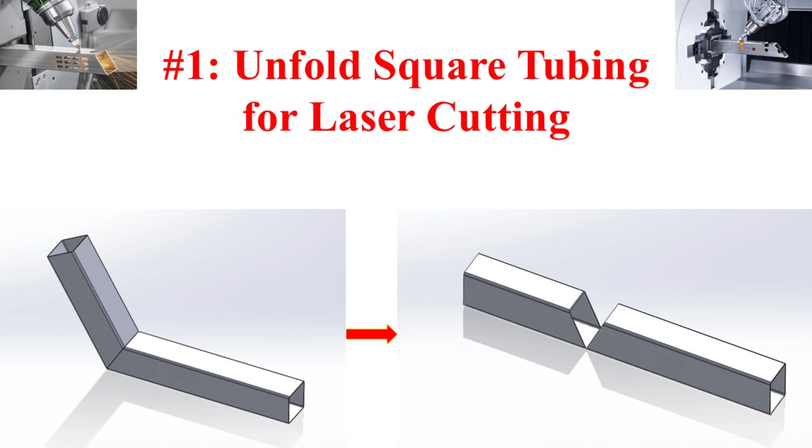Today I'm going to show you the first video on the list: Solidworks weldments and sheet metal laser cut design. This article will make the simplest part, a folding steel square box. Let's get started.

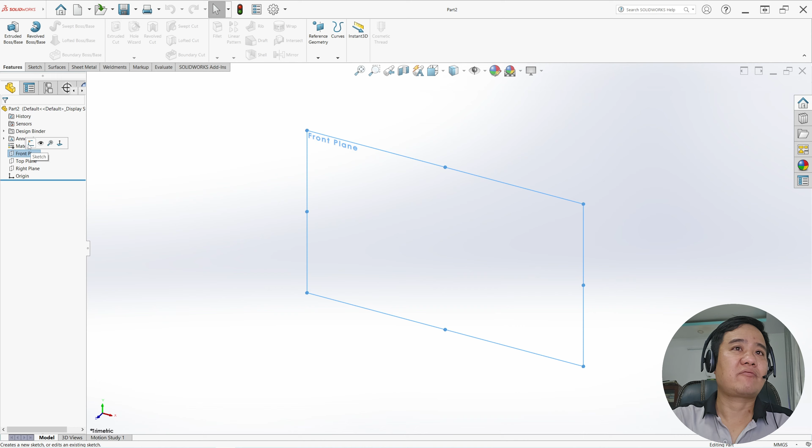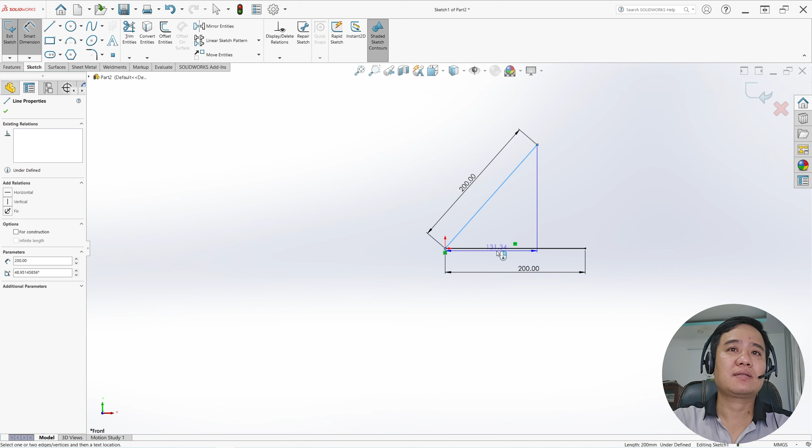First, you create a sketch on the front plane. I'll draw two straight lines, a horizontal segment and a second line, then add the size. Please note, I don't have a vertical binding for the second straight line - I made a corner for easier customization.

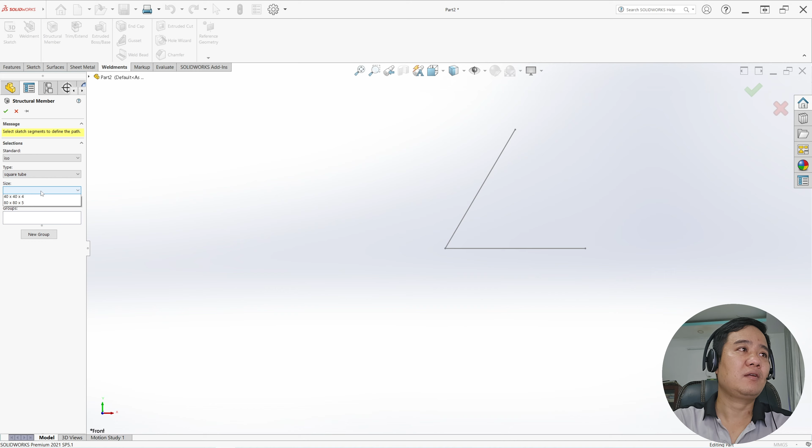After creating the sketch, go to the Weldments tab. To create the steel box, select Structural Member. The standard I will choose is ISO, and the type is square box steel. I will choose any size.

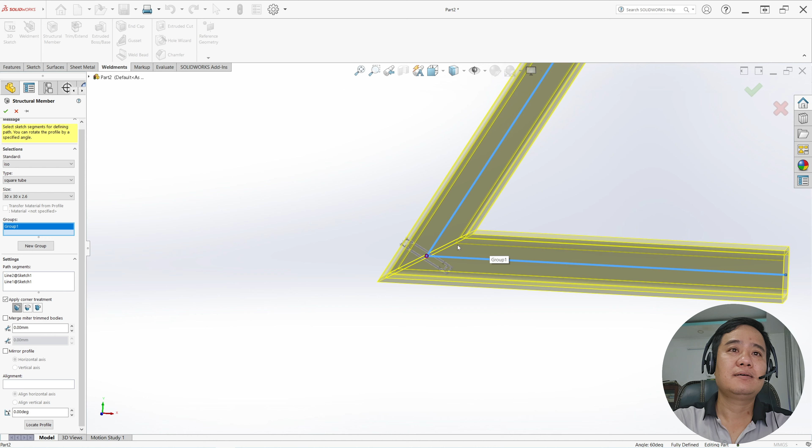Pay attention here - this G1 is the gap between two steel boxes. Between these two box steel pieces there must be a gap to combine without error. I'll leave the gap at 0.5 mm, so here it will have a gap.

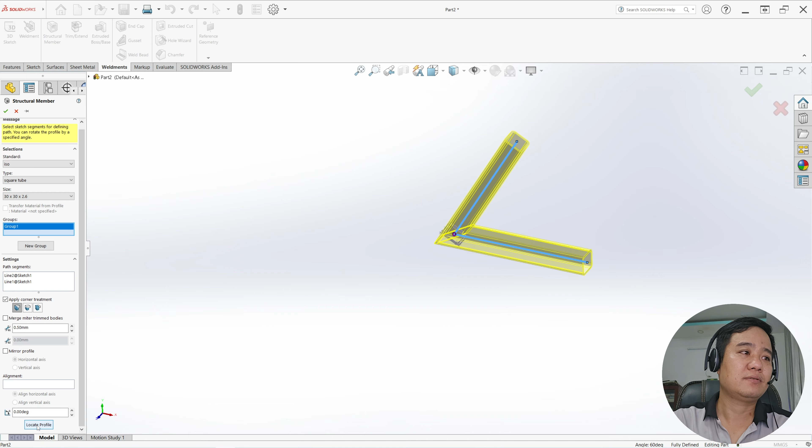Go to the Locate Profile section. Select the return path for the box. Steel is outside the edge to make sheet metal. Select the path at this point.

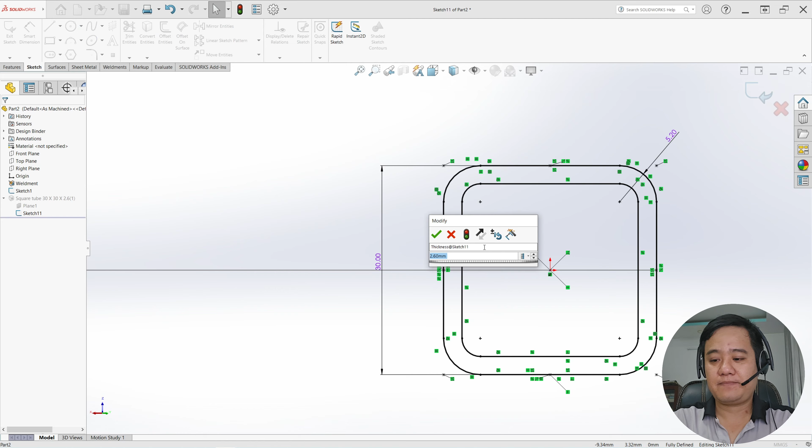Modify the sketch of the box steel according to the desired size. For example, change it to 30 mm steel, 1.2 mm thick. I've finished the part, the steel box.

Next step, I will create a sheet metal part. The steel plate will coincide with this plane of the box steel.

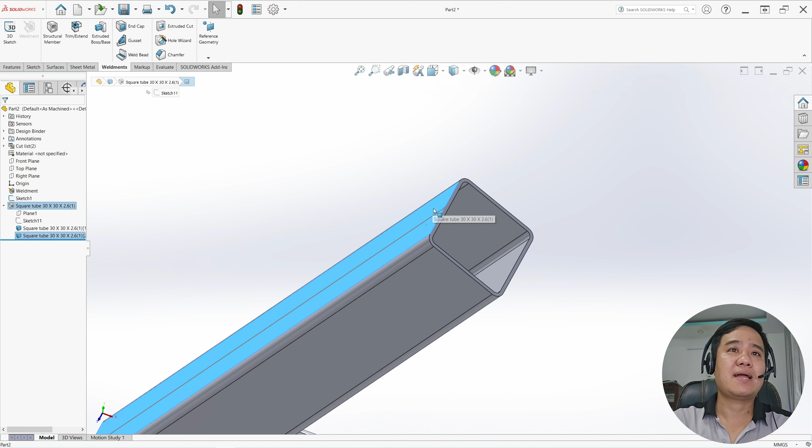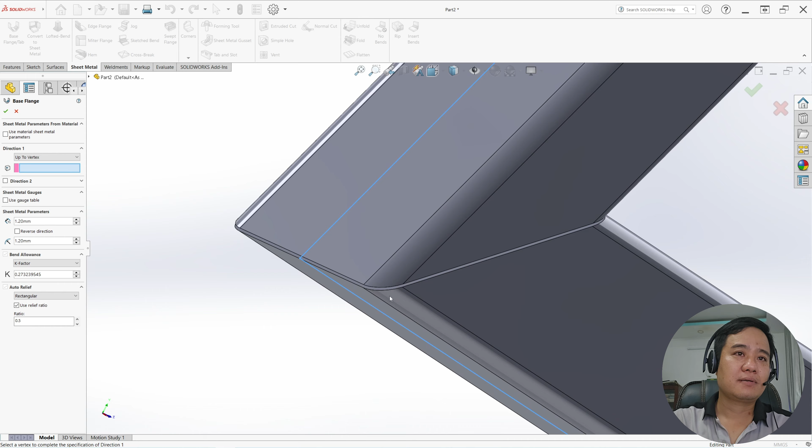Select the initial sketch, then select the Sheet Metal tab to make a sheet metal. Direction 1 to vertex - select this point. Same with direction 2 - choose the second point.

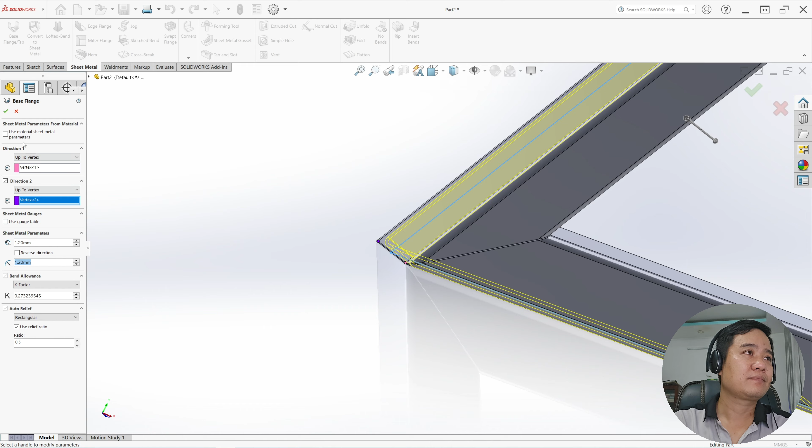Attention, the thickness of the sheet metal must be equal to the box steel - 1.2 mm. Select T equals 1.2 mm and R equals 1.2 mm. Now we have 3 bodies: 2 weldments and 1 sheet metal.

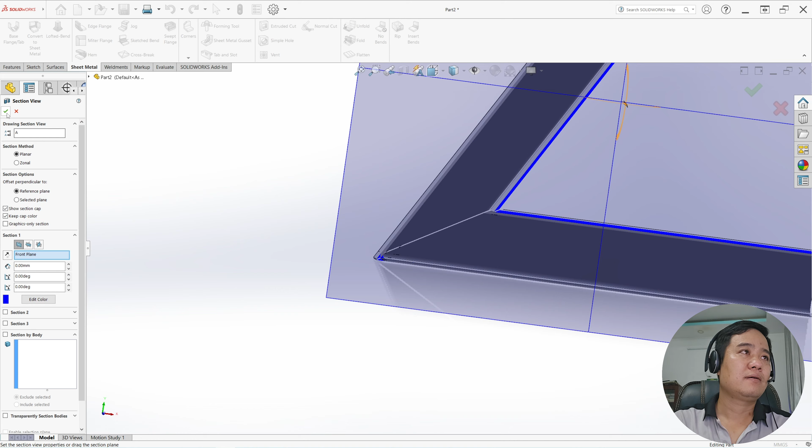Create a front section for easy tracking. The R part of the sheet metal is being pushed through by the box steel. Cut off the remainder of the box steel.

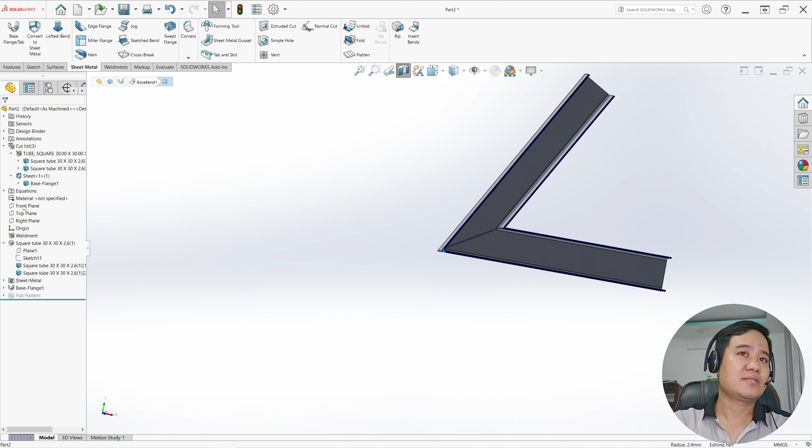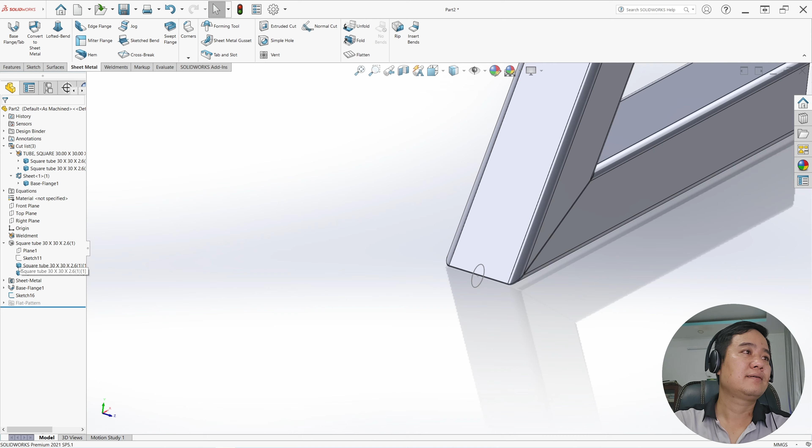I'm going to create a sketch on the front plane. Make a small circle going through this point, then use the Extruded Cut command and select through all both.

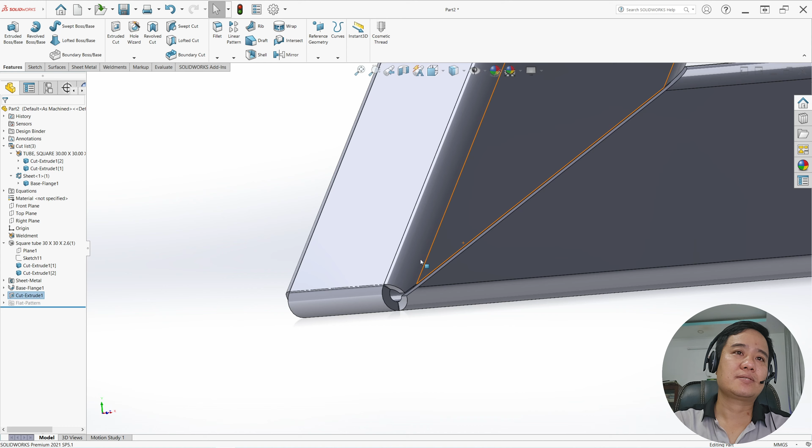Select body cut is 2 parts of box steel. You see, the R part of the steel plate has appeared.

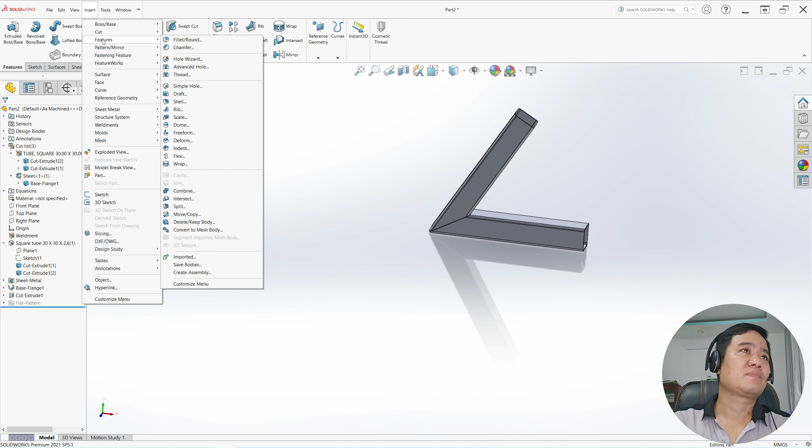Next step, combine the 3 bodies together. Select Insert, Features, Combine. Choose the 3 bodies, select Add, then OK.

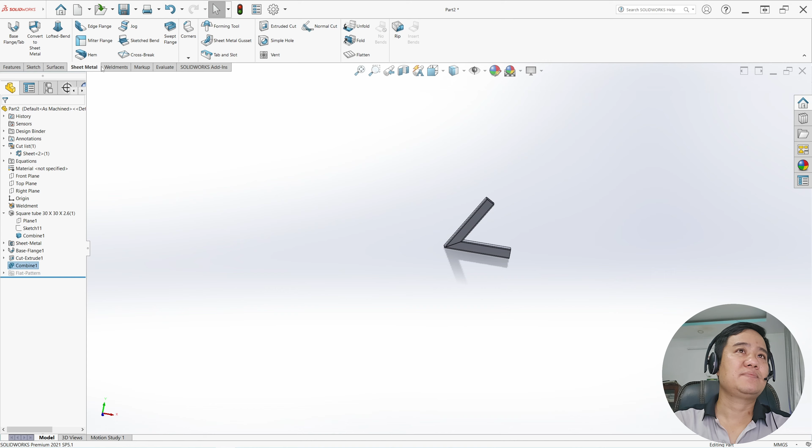Select the Flat Sheet Metal tab - the steel box is flat spread.

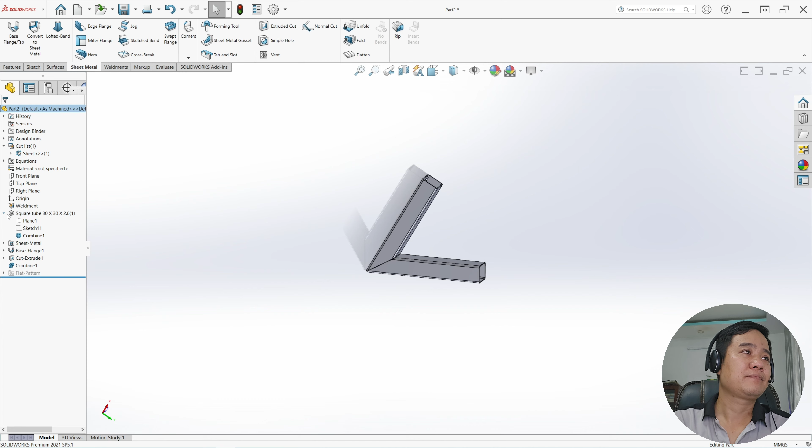With Solidworks it is very easy to customize. I can fix the box steel size - go to Sketch, Resize. For example, increase the length to 300 mm, angle to 120 degrees. Very easy to edit size.

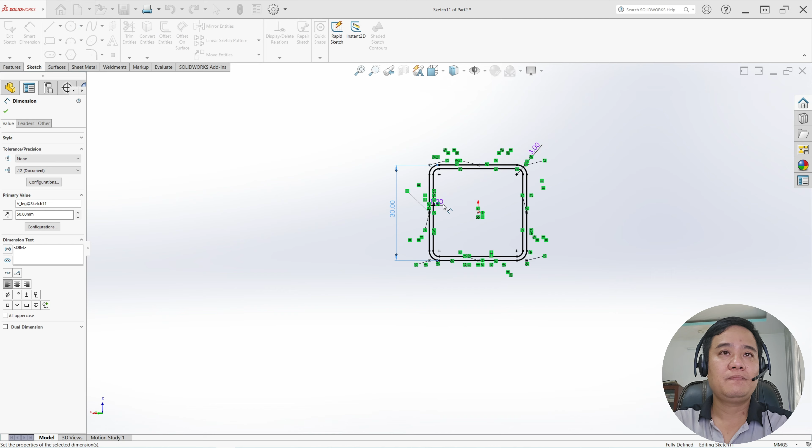It can also be replaced at the same time - the box steel type. Go to Sketch to correct the section size: fix box 30 to 50 mm, thickness increase from 1 to 1.5 mm.

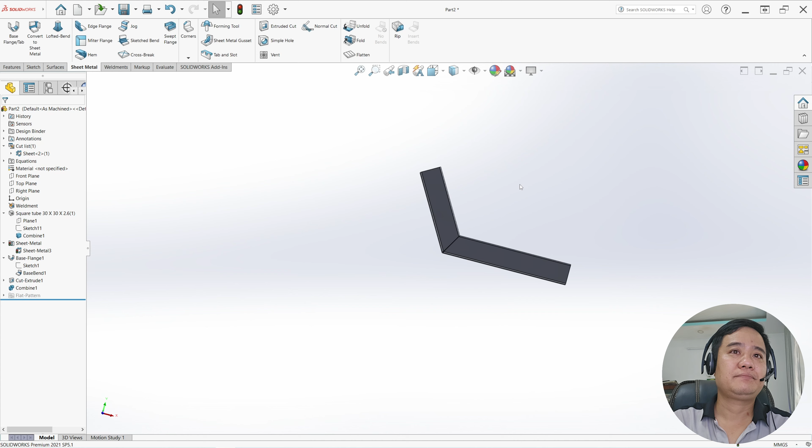Note, when changing the thickness of the steel box, you must modify the steel plate: fixing T equals 1.5 mm, R equals 1.5 mm. The drawing is finished - save the file.

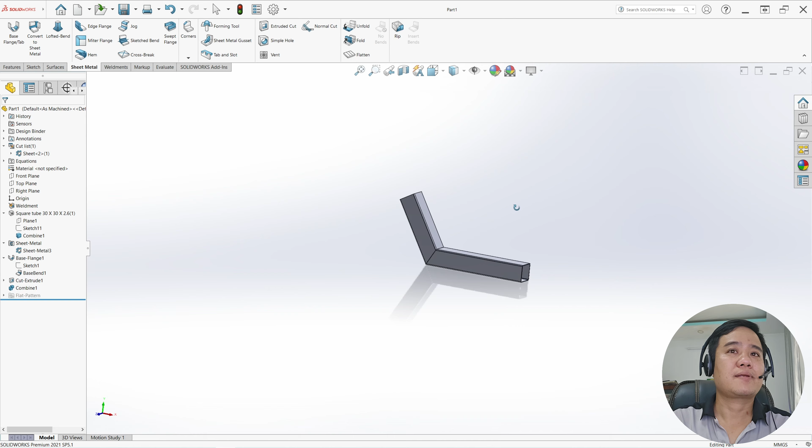For laser cutting, flat spread and save as IGS or step file format.

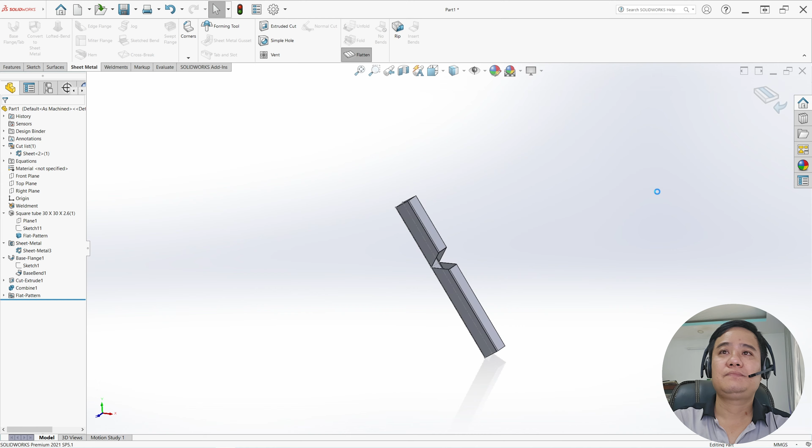Simulation of pipe cutting and file export - I use TubeKit software.

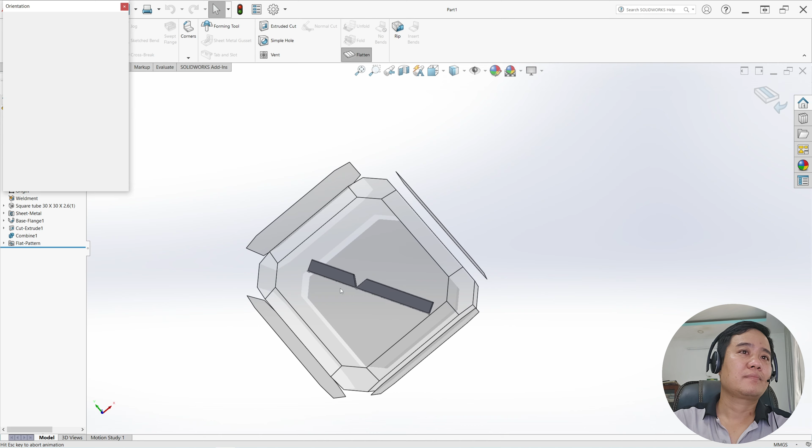The steel pipe shaft is not on the spindle - X, Y, Z. When the coordinates are wrong and you output the IGS or step file, TubeKit software will not receive it. You need to modify the file.

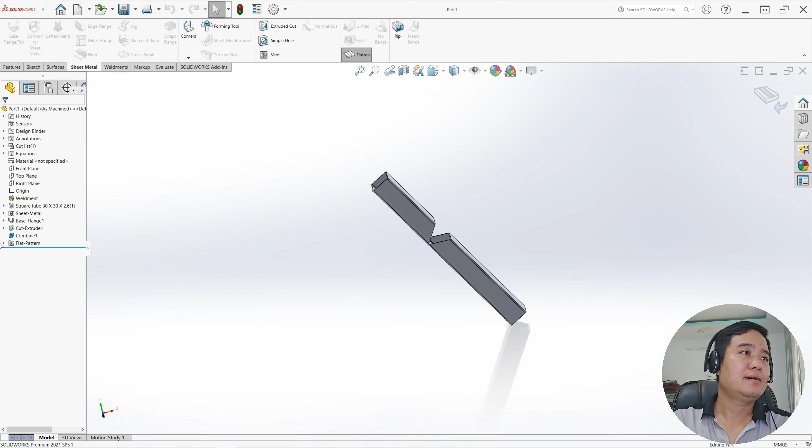Select Edit Flat Pattern, select the spread, and spread it flat. Align the long box steel according to the X-axis coordinates. Then the add file will not fail - save the file in step format.

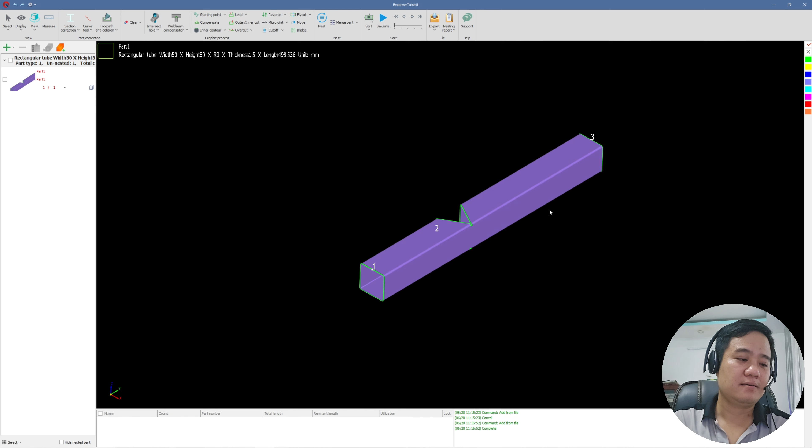Open TubeKit, add from file again. Now TubeKit has received the file. Select Simulation to simulate the laser cutting.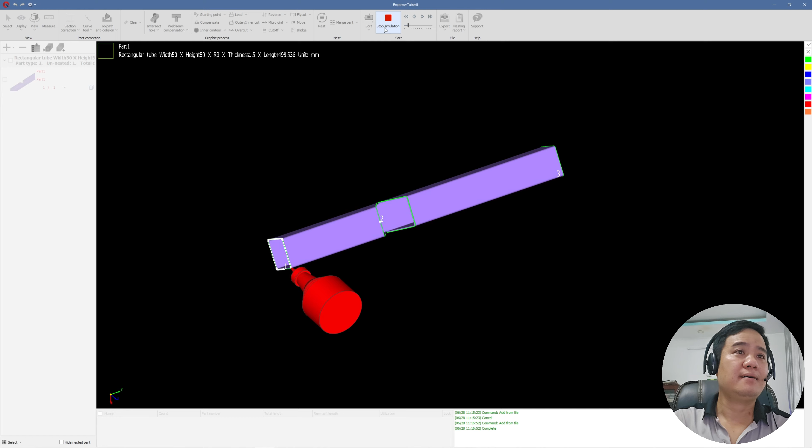You can find more TubeKit software online - how to draw, organize files, export code. Tubes can be pre-drawn without going through Solidworks software. I used it to test cut files, not for detailed instructions on how to use TubeKit.

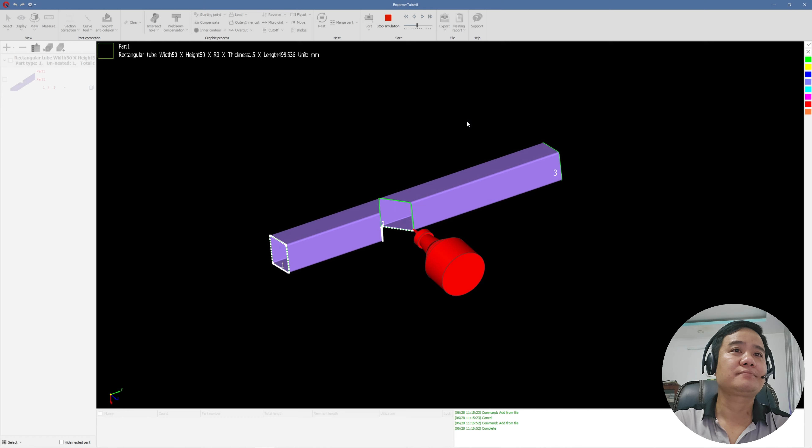In addition to TubeKit, you can use other similar software. Solidworks save to IGS or STEP is usable for cutting software.

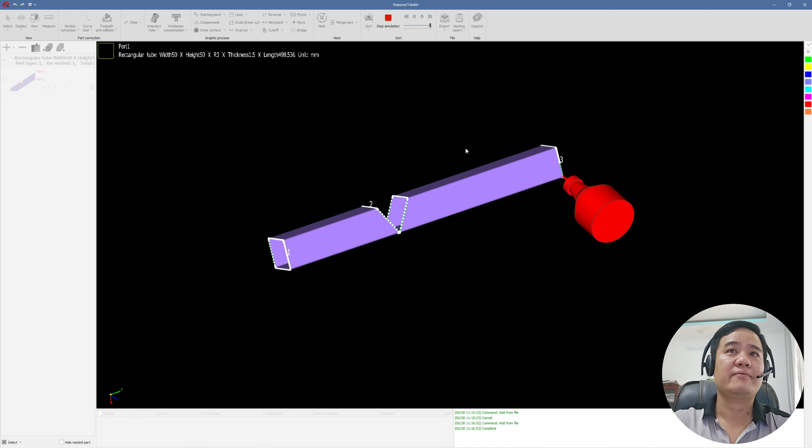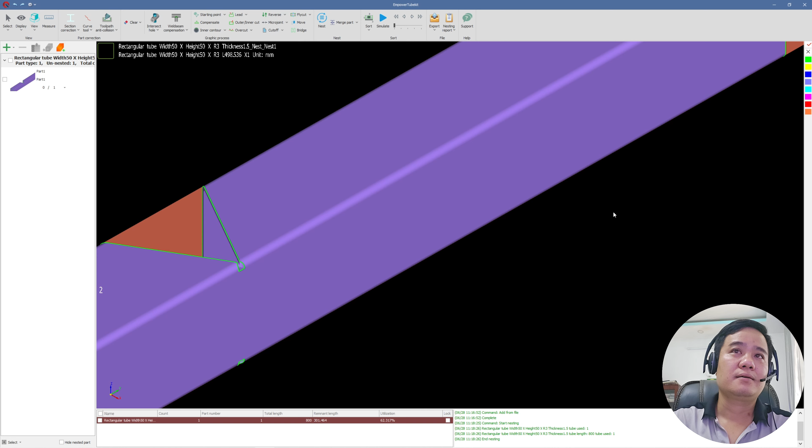The cutting simulation is complete. Put the file on the workpiece, fixing the workpiece length at 800 millimeters. Export to cut file - this is a file that can be used for the laser cutting machine.